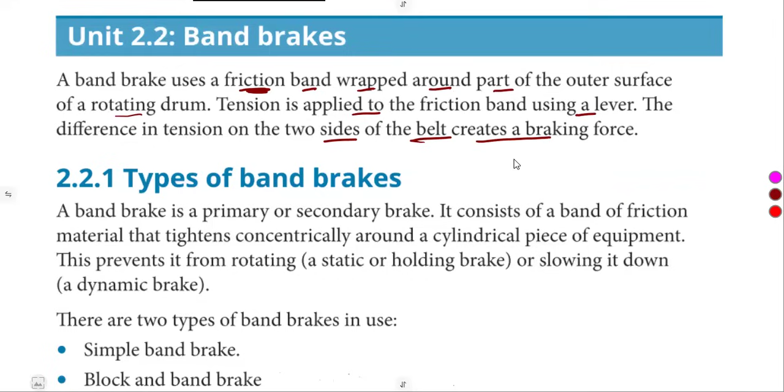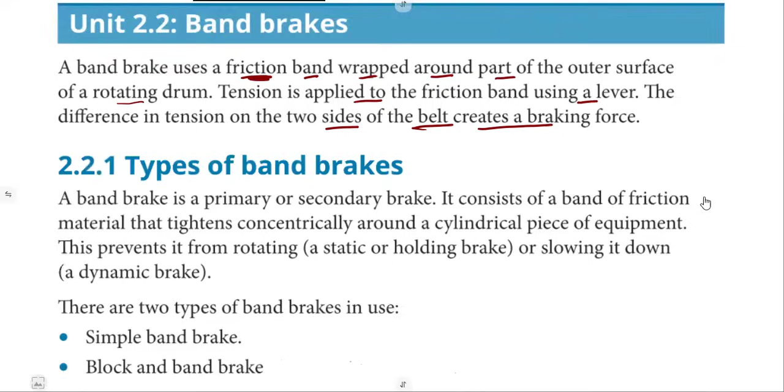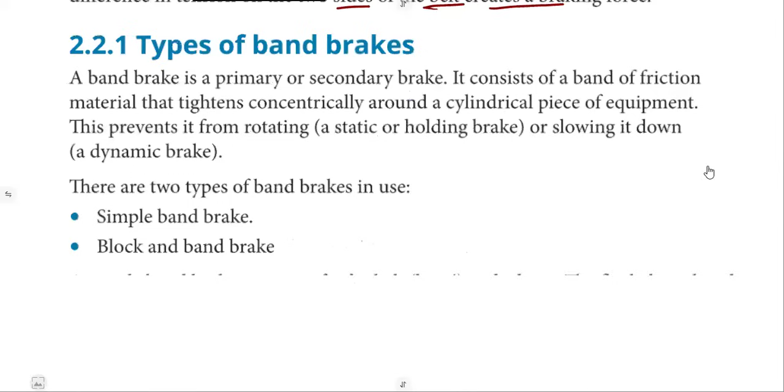Remember, I told you guys to go through your belt drives so you understand more of what we are actually working with. So it's the basic view of what we are going to deal with, these two types of band brakes. According to this source, I want us to consider that there are two types of band brakes in use.

The simple band brake, and here we have block and band. According to this source, I think this is the TVET series. It's fine if you work it like that, but I don't want us to use this. I want us to work here with the differential band. Differential band brakes, and the one we call block and band brakes, is a type on its own.

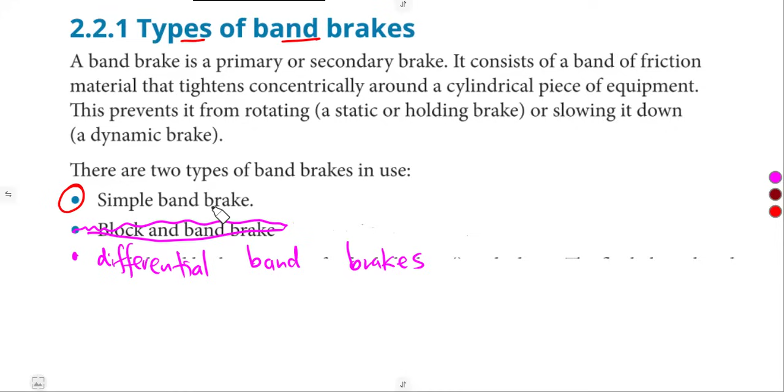As we have got band brakes, we have the block, we have the band, and band and block as a type. Here we need the types under band, the types under block, the types under band and block. So this is what I'm trying to say. So as I consider the two types of band brakes, this is what I'm going to give you guys. For us to understand more, I'm going to explain in emphasis the simple and also the differential band brake so that we'll be together.

So let us start with the simple band brakes. In this type of brake, one end of the band is attached to a separate rigid support or to the fulcrum of the lever, and the other end is attached to the lever at a distance from the fulcrum. Take note.

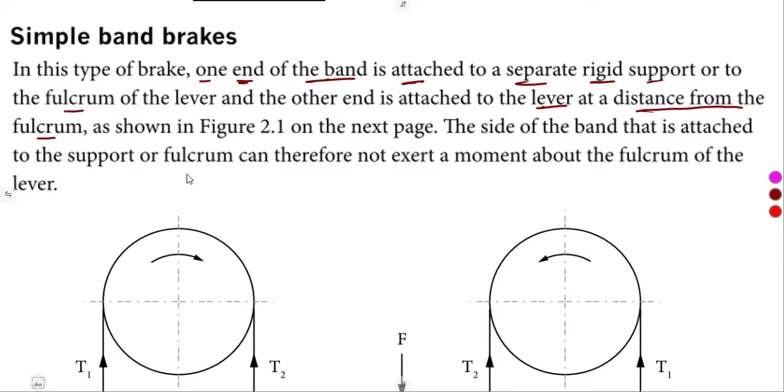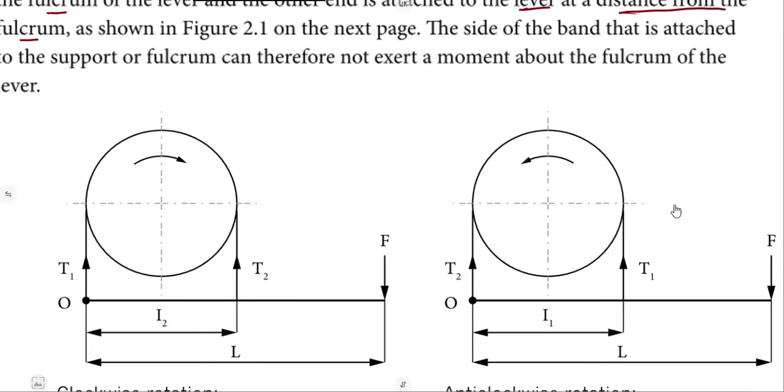At a distance from where? From the fulcrum. That is the most important part that we are supposed to be having there. That's the important part. So this is the part we want to see here. As we have in this presentation, let us try it like this.

We have got maybe, let's consider clockwise rotation and also anti-clockwise. So if we've got a clockwise rotation, remember the clock moves this way. This is the direction of the clock, clockwise. So as long as we are moving like this, it is clockwise. Then anti-clockwise, we are now opposing the other way. This is now anti-clockwise. We are now considering an anti-clockwise rotation.

All right, so as we take, guys, once we consider this part, we need to go back to our moments. Taking our moments about the point O, which is about the fulcrum. So this is where we've got our fulcrum here, the point O. So for a simple band, this is where our point O is going to be. You're going to notice a slight difference where the fulcrum is no longer at this point, that's on a differential band. So if we're to consider taking moments about the point O, which is our fulcrum, and this is the lever that we are going to be considering. That is the part that we are saying here.

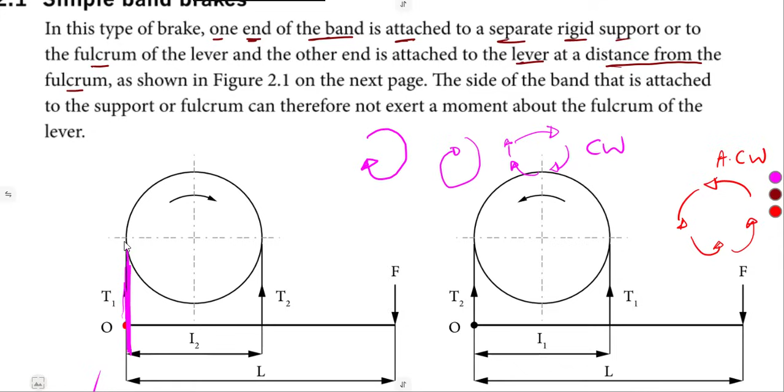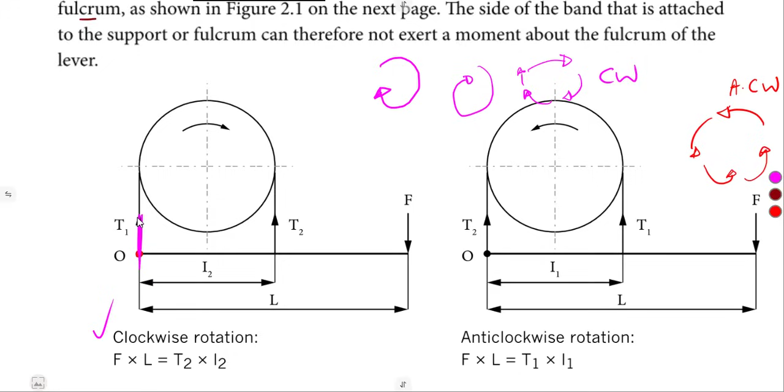Then the side of the band that is attached to the support or fulcrum can therefore not exert a moment about the fulcrum of that lever. There's nothing that we're going to have at a point which lies on the fulcrum, because remember, when you consider moments, it's force times distance. So there is no distance from here, from the fulcrum. That is why they are saying the side of the band that is attached to the support or fulcrum can therefore not exert a moment about the fulcrum of the lever. All right, so that is it.

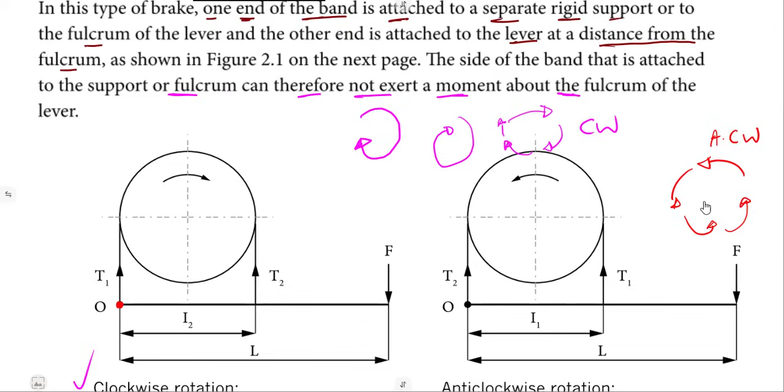So these are the ones, T1, T2, according to the rotation. Because as you can see here, we had T1 and T2. Now it is changing, it is T2 to T1. So how do you consider this?

You consider according to the direction we move. T1 follows direction. We start from T1. If it's clockwise like this, we move from T1 to T2, in that rotation of clockwise. So when it's anti-clockwise, we also do the same from T1, where we end, where we are going - the side of T2. Anti-clockwise, T1 going to T2. If it's clockwise, T1 going to T2.

So those are the ones that we are dealing with: one attached to the fulcrum and another one on the lever, but at a certain distance from the fulcrum like this. That is what we consider.

So this is it, guys. And we've got our drum here, which definitely from the center of this drum to here, we'll be talking of the radius of the drum. We'll see where it is needed. And our force, which is the applied force, just a normal force being applied also on the lever, as we can see, which is at a certain distance to the fulcrum, distance L.

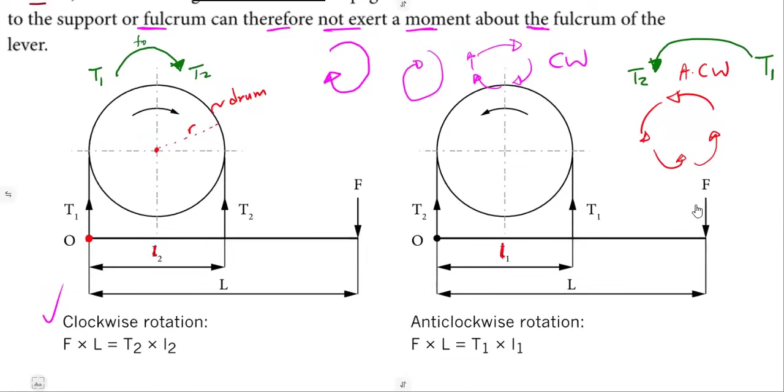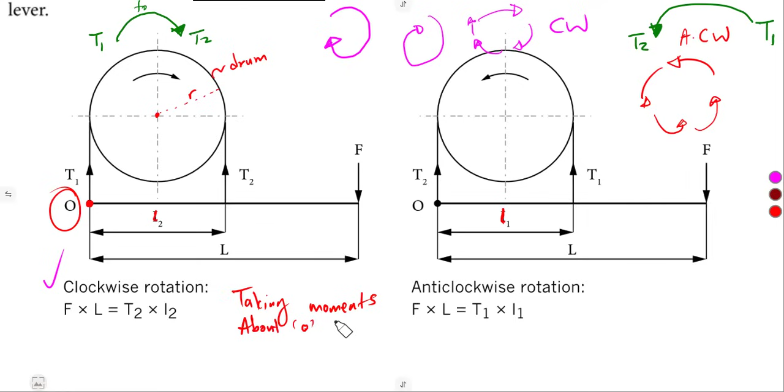And applying your forces, taking our moments about the point O, which is our fulcrum, we are going to notice, as we have our moments - taking moments about O, which is our fulcrum in that case - we consider the sum of the clockwise moments being equal to the sum of the anti-clockwise moments. So clockwise, how does the clock move?

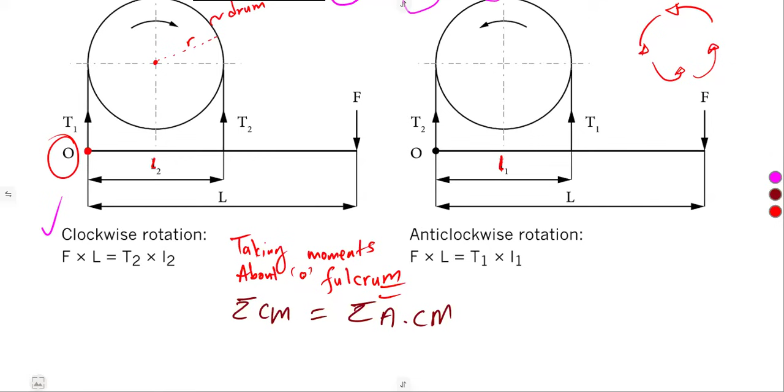We have got this one under a clockwise rotation - we're talking about the way the drum here is moving. The drum is moving in a clockwise direction. Not to say this is of the moments, no - the issue of moments is on its own. Here it is the rotation of the drum. So they can just give you a diagram without a rotation, then on the question they ask you to calculate this. Maybe they want you to find T2, or this force, or anyone - maybe they want you to find T1, or this force, no matter what you're given there, or even the distance.

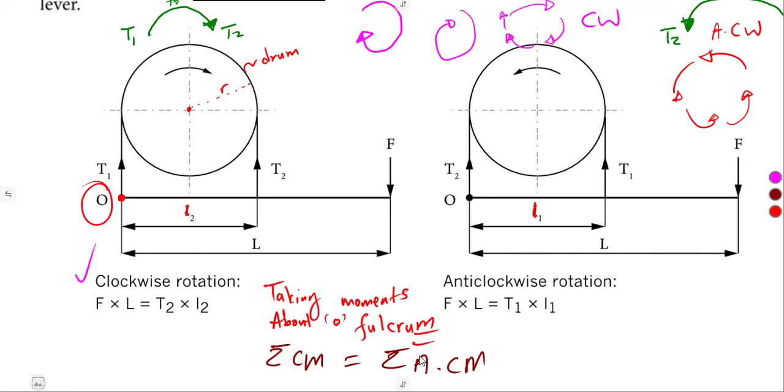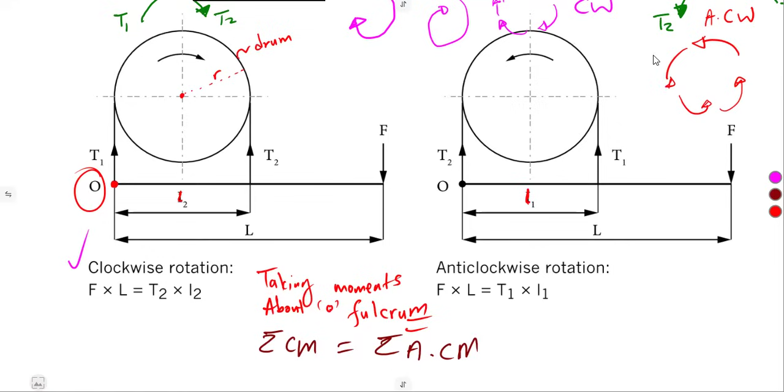That is where you apply this condition of your moments - not to say my diagram is under clockwise, so there's another way, no. Here it is just the drum - the drum is the one that is rotating in a clockwise direction. But as it's rotating clockwise, how did it affect our diagram? It affected T1 and T2. Remember T1 and T2, how I explained they move in that way of clockwise or anti-clockwise, from T1 to T2. That is the effect, that is the only effect. So how do we take our moments? Remember our moments, guys, as we take our moments about the fulcrum - this is where we have about the point O. So remember you're considering here, this is our lever.

So let's start with clockwise - it means we are taking these ones which are going this way to the fulcrum, that is clockwise. Anti-clockwise, they are going this way to the fulcrum, that is anti-clockwise, remember. So which one is going clockwise? T1, don't even talk about this because it is at the fulcrum, this one - so it's a waste of our time to consider that T1. Let's just ignore this one, okay? So let's move on to T2. T2, as we can see, it is facing up, so as it's moving towards the fulcrum, it's just going to go this way, this is it, to the fulcrum. So this is what?

Anti-clockwise, as we can see this way. T2, from where it is, is just going to go like this - that is anti-clockwise, so T2 is under anti-clockwise. What about F? F is pointing down, as you can see. It will be going in this way to reach the fulcrum. This is the direction that it's going to take. And which direction is this? Clockwise. So as you can see, this one is clockwise. So we only have one clockwise and one anti-clockwise.

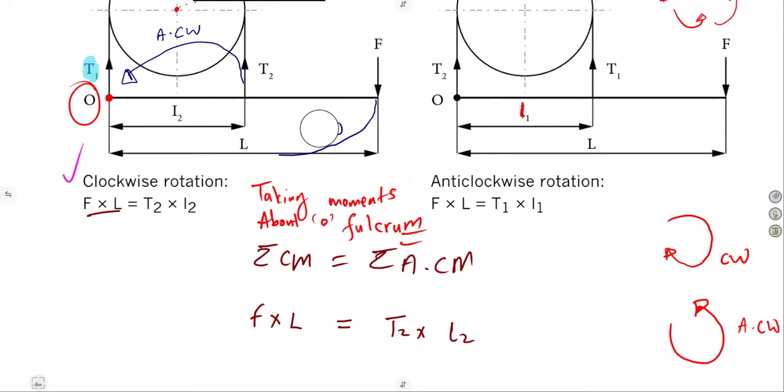When it is like this, there's nothing. It's just these two, guys. There's nothing here. Just these two. There's nothing there.

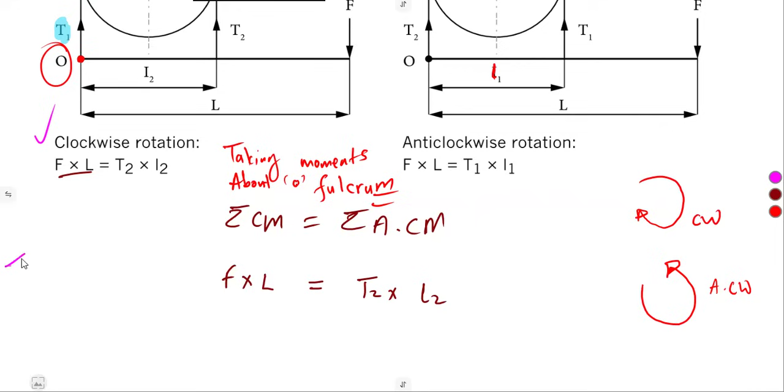So using this, you use this formula when you are asked to calculate the torque - the tension, sorry, why am I on the torque? The torque is another part on its own. The tension, sorry - when you're asked to calculate the tensions, it's T1 or T2.

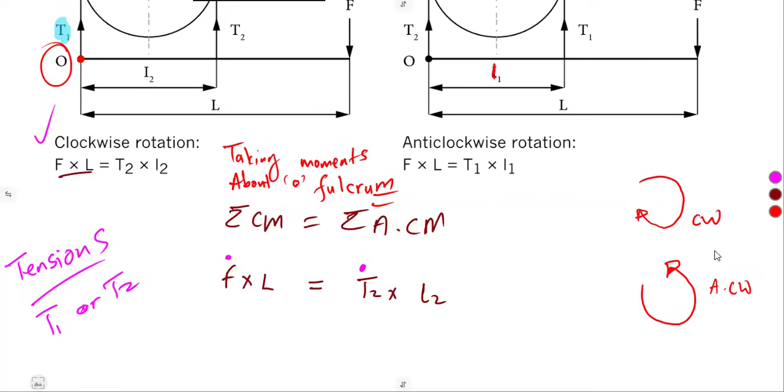So if they want you to calculate T2, it's definitely a condition like this of a clockwise rotation of the drum. You know that on this formula, there is T2 you can calculate, or maybe they want you to calculate the force, or maybe even the distance. All right, so this is what you have.

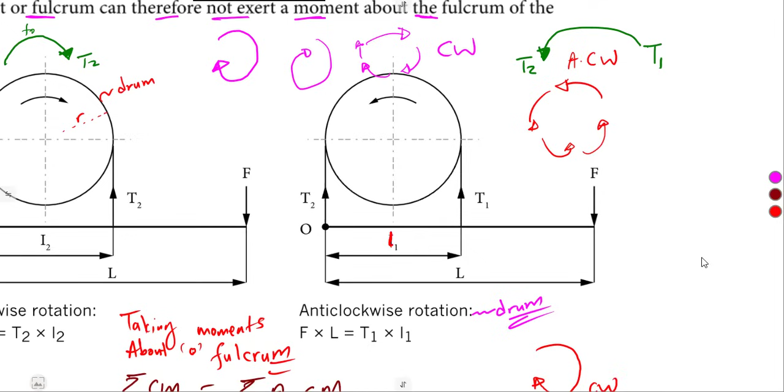So guys, nothing has changed if you check on this side for an anti-clockwise rotation of the drum. Remember, I said this is the rotation of the drum - it only affected this arrangement of T1 and T2. Only that. If we understand this, guys, we are not going to have a challenge. The reason why is once we have this, if we are to take our moments about the fulcrum, just like here what we did, we are going to notice that the sum of the clockwise moment is equal to the sum of the anti-clockwise moments.

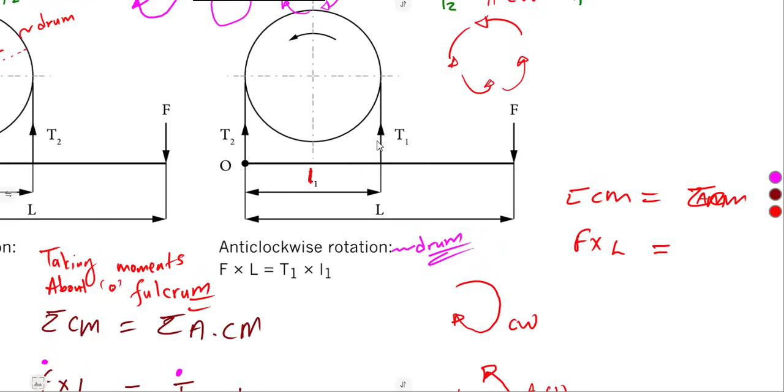So which one is going in the clockwise? Same as what we saw here, does not change, guys. This is our diagram. This is T1 that we are considering going this way, anti-clockwise. This F going this way, clockwise. Nothing has changed. So it's going to be F times the distance back to the fulcrum, which is L, is equal to the anti-clockwise - it's T1 back to the fulcrum. So it's T1 times L1. Just like here, nothing has changed.

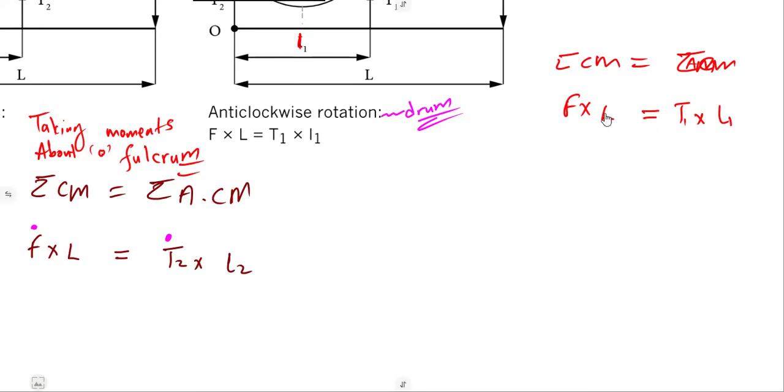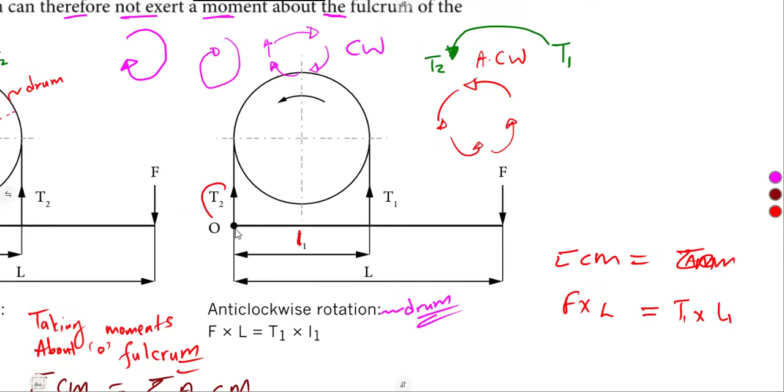So as you can see, when it is of this condition of a simple band brake, the calculations for T1, F, whatever that you want, is the same, guys, for any part that you're given. Just know the rotation of the drum so that you know exactly this arrangement here - it affects that arrangement only. So if you do not pay attention on how the drum is rotating now, that's where you end up using T2 where T1 is, or using T1 where T2 is supposed to. No, pay attention to the rotation of the drum, this part. Once you know that, you are done.

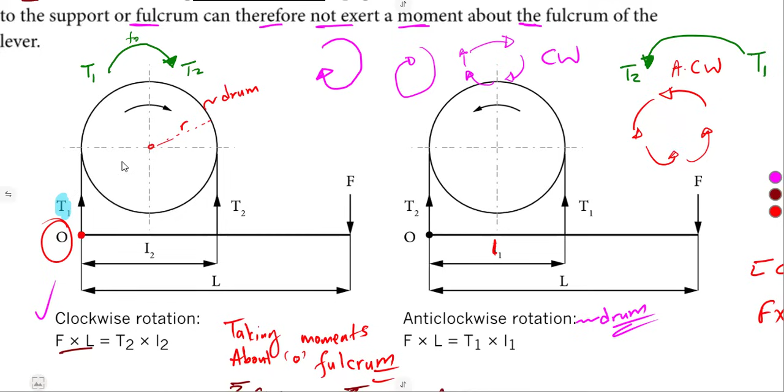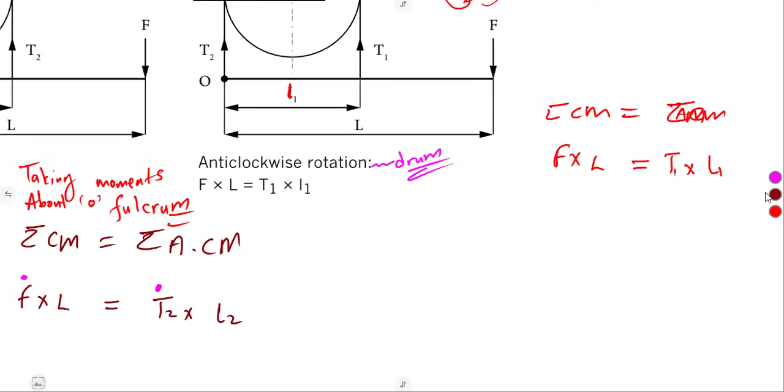So we are going to apply this later on in terms of our calculations. Let's see the differential band brakes. In this type of brake, both bands are attached to the lever at a distance away from the fulcrum. That is how we know this is a differential band. Both bands - here, the bands, one was attached to the fulcrum, another one a distance away from the fulcrum.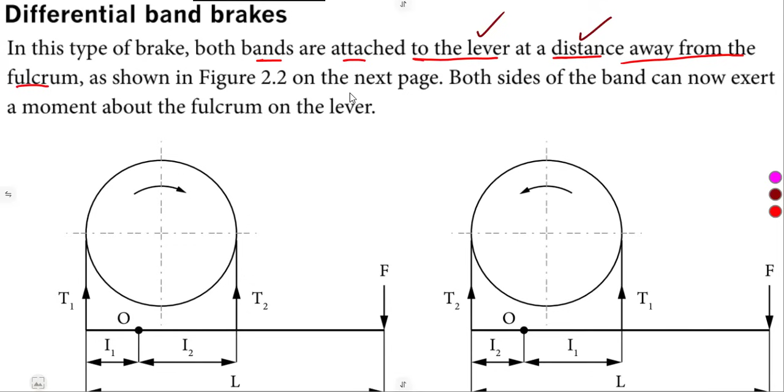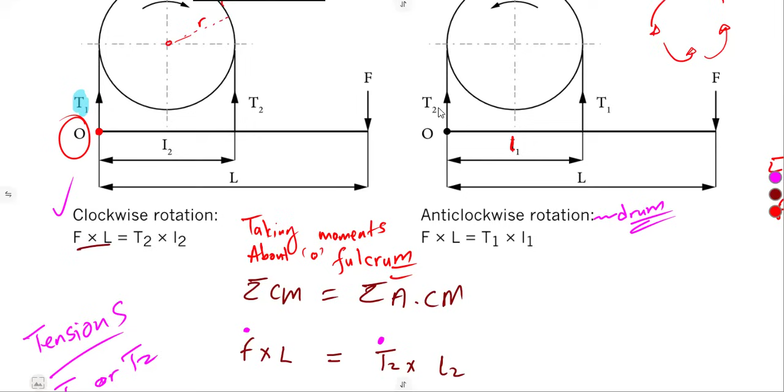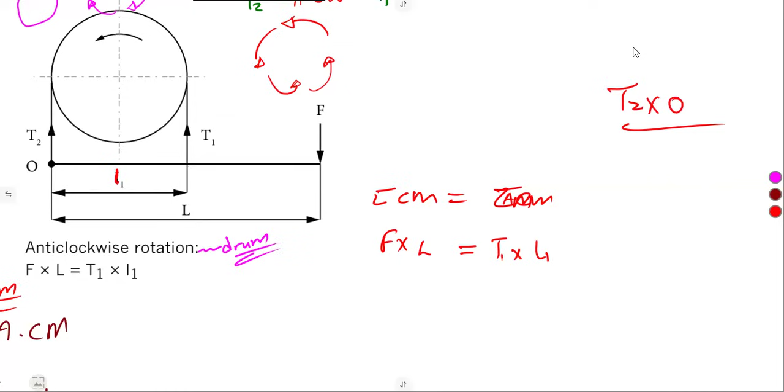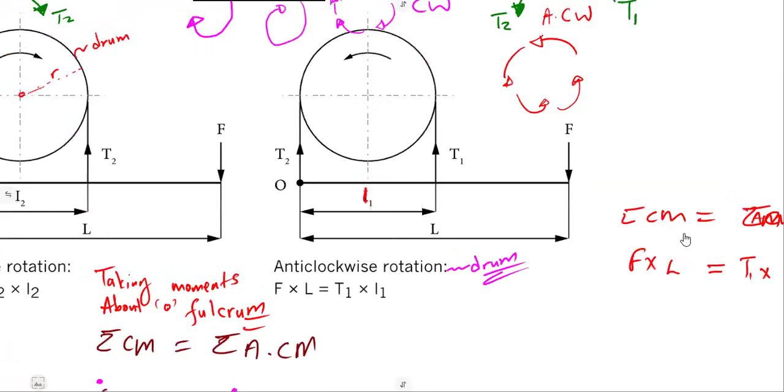So both sides of the band can now exert a moment about the fulcrum on the lever. It's no longer here where we are saying if it is like this, on our formula, we don't see T1 because T1 was on the fulcrum, so we don't see T1 on this formula. If it is this one, T2 was on the fulcrum, so we don't see T2 on the formula when you apply our moments because there's no distance - it was supposed to be T2 times 0 or T1 times 0, so we are not doing anything if it is like that. But in this case, that can never happen because T1 and T2 are both at a certain distance away from the fulcrum.

Once you understand this, you are done. That's a differential band.

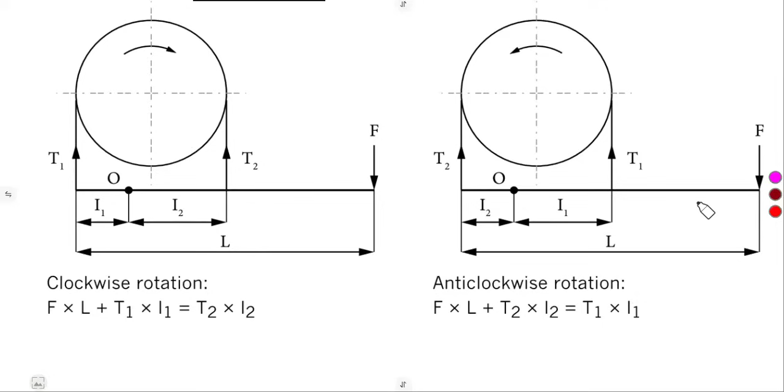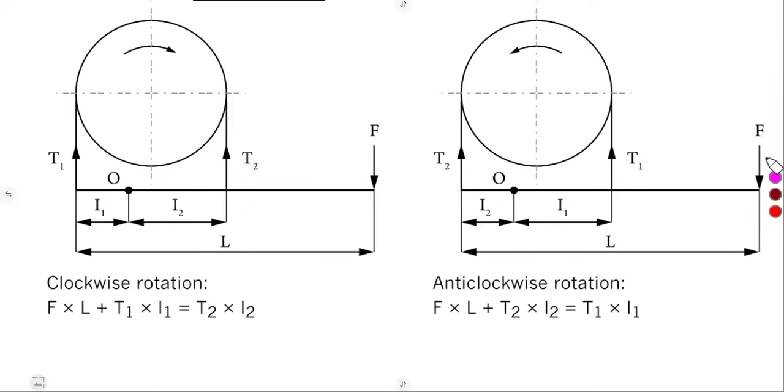According to this source, this is the best way I think that we can explain it. For the TVET series for Mechanotechnics N6, I don't know guys, I think they just... some of these words might affect you if you're using the textbook, but there's some important things they left out. We're used to them giving us exactly what we need, but there they were just beating around the bush. I don't know what happened or who was the author, who was managing that Mechanotechnics N6. But anyway, that is why I have to bring other sources to you so that you get important information for when you are going to answer your exams. But please continue to use that textbook. I'm there to make sure there is clarity in it also, so if there's any section you don't understand, let me know.

So this is it, a differential band. Now we notice our fulcrum is shifted. So how are we going to have our moments if the fulcrum is shifted like this?

Still the same way, we consider the drum in a clockwise direction. Remember guys, do not mind this one, it's about the drum, the way it rotates. If it is clockwise as we can see here, it affects how T1 and T2 are positioned, from T1 to T2. So that's what we see, T1 going to T2. For anti-clockwise, same consideration, from T1 going to T2. So T1 is always on the tail from T2, okay, that is the condition there.

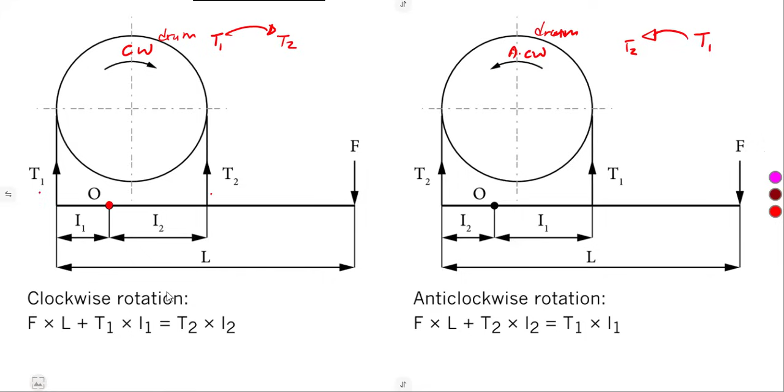So let's consider our moments. Let's start with this one, for a clockwise rotation of the drum, what is it that we're going to consider? Remember our moments guys, the condition is taking moments about the fulcrum. Clockwise moments, the sum of the clockwise moments must be equal to anti-clockwise moments. So this is what we're going to have.

Which ones are for the clockwise, the way the clock moves? This one, you're going to see that it is F like this, going clockwise to the fulcrum, it's going to go like this, that's clockwise, alright? Look at T1 and T2, they're facing up, so T2 is going to move this way, which is anti-clockwise. This is our T2 going to the fulcrum, so it's going in an anti-clockwise direction. Then if we consider T1 to the fulcrum, it's going to go this way, this is the direction. So which direction is this? Clockwise, so it's going in a clockwise direction.

So on the clockwise we've got two things here, the F we said is clockwise, as you can see it's going to go like this, so it's clockwise. That's why we've got these two, F times L. On our formula here, F times L, which is F times this distance.

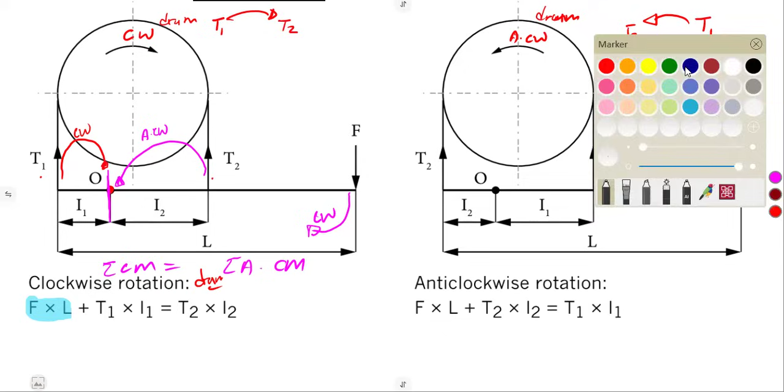Alright, there they made a mistake on the presentation. I thought I was going to edit this one but I didn't manage to in time. So let me just correct this one here. I don't know, you see this textbook guys, the people doing them were also rushing, I think it was an issue of market. The TVET series wants a market, they want a market, they are rushing, they want to remove syllabuses at the same time. These people, I don't understand, do they want people to pass or are they now after the market? So guys, don't tell them that I said this, but I don't understand.

So it was supposed to be like this. It's F, you take the distance from force to the fulcrum, here, this is our fulcrum here, so it's supposed to be there. I think like this we can understand each other. Then the same thing here, supposed to end here. So if it is like this, then our formula becomes correct. Our L is supposed to be the distance of F to the fulcrum here, not to T1, not to any tension, but to the fulcrum, as we said, taking moments about the fulcrum so that we understand each other.

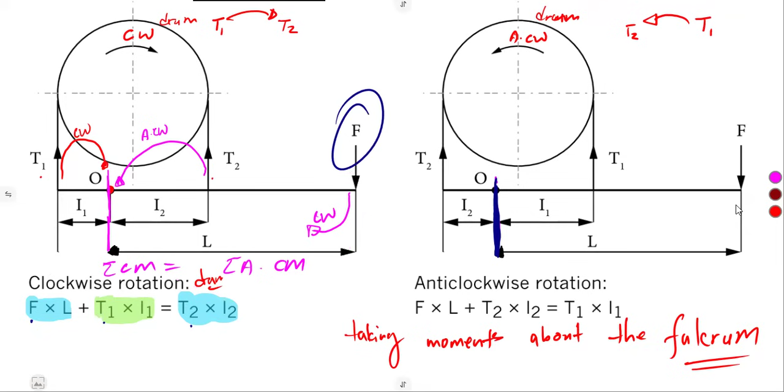So taking our moments about this fulcrum, we're going to see that those ones for the clockwise never change. It's still the F that we had. So it's F back to what? To the fulcrum. So this is what we have here, our force F back to the fulcrum, this one.

But instead of us having T1, this is now T2, going this way, back to the fulcrum. It's now T2 and what? L2. So this is what we have.

Remember, T1 and T2 are affected by the direction of the drum. That is the only part that changes. Which one is going in the anti-clockwise? Definitely T1 is going this way. So that's T1 times L1, the distance back to the fulcrum here.

Nothing has changed. So know the direction of the drum, know it very well so that you do not confuse these T1 and T2.

All right, so once you know this and have applied all this information, what you need are the formulas, those ones that I mentioned individually. I want you to refer back to your N4 Mechanotechnics, working with your belt drives.

But anyways guys, I try by all means to understand that some of us, some of you, are into work, going to work at the same time. You need to come back and cover up your stuff to advance as you are working, and for you to go back to your N4 stuff, it's going to take a lot of time.

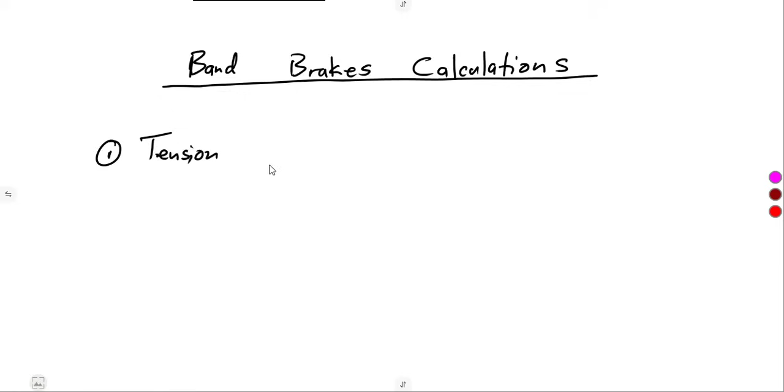So let me try and list the formulas that are important. All right, so the first one is going to be on the tension ratio, as we do understand those belt drives, guys, where we've got the tight side and the slack side, this and that. Remember, when you're dealing with belt drives.

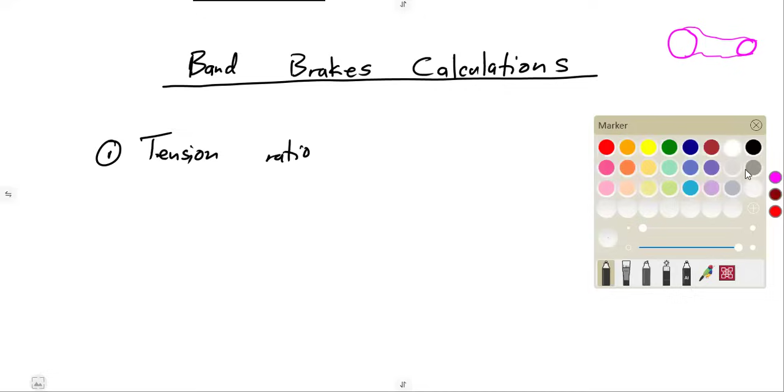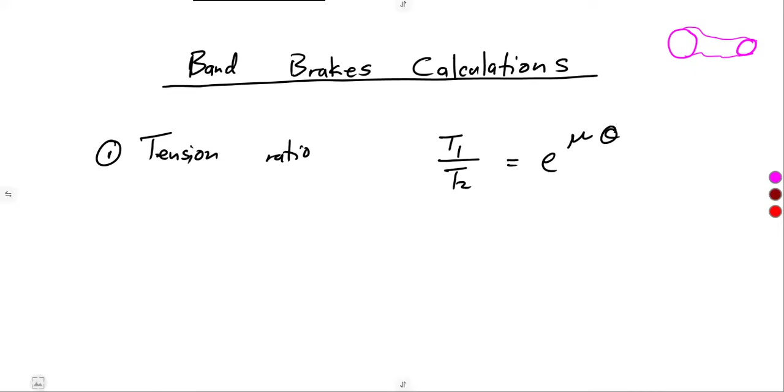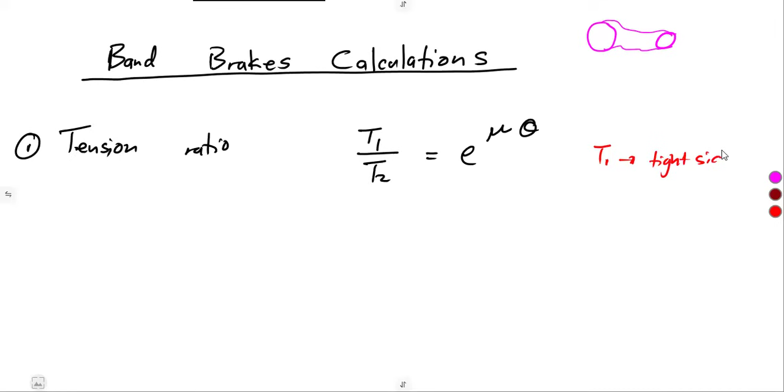So that is the condition that you're going back to again. So the tension ratio, that's T1 over T2, is equal to e to the exponent of mu theta. Where T1 and T2 are simply these tensions, but we understand that T1 is what? The tight side. So T1, that is the tight side tension, which is actually the fixed end, where we have got the tight side.

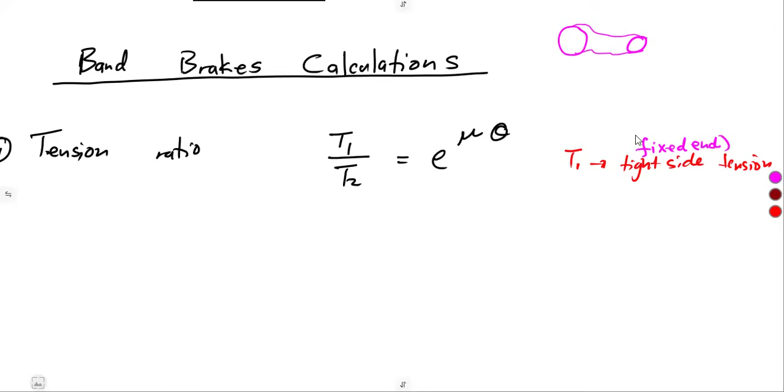It can also be referred as the fixed end, the fixed end tension, the tension that is for the fixed end. Tension, guys, is just like force, remember? So it is measured in what? In newtons. Then T2, we do understand that is our slack side.

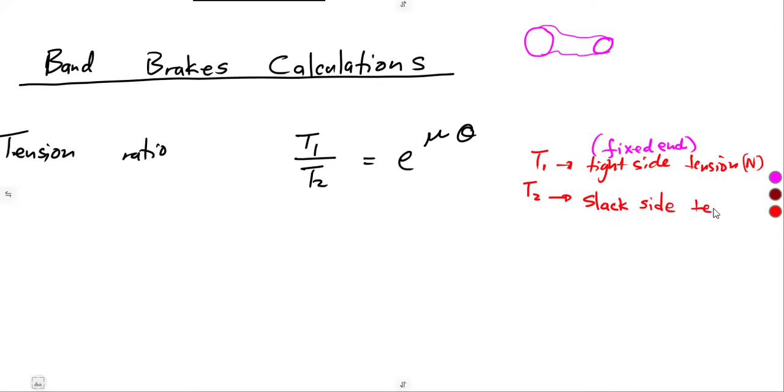The one that is slack, that is what do we call it, guys? You see, English, the disadvantage of English is, what can we say? Something that you want to explain, like you understand it and you want to explain to someone to make it simpler, you might make it difficult because of the way they understand also. Something that can be simpler to you can be difficult for someone else to understand in terms of simpler understanding. But I just hope these words, guys, tight, slack, have meaning to you.

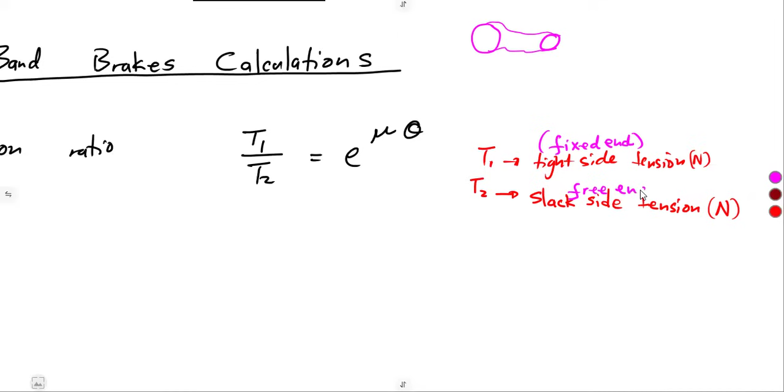So this is just like a free end fixed on the tight, all right, free where it is slack. So that is the free end. All right, so those are the tensions. Remember, this is E, which is already on our calculator, the exponential on our calculator. So guys, we're just going to put that one.

But we've got the coefficient of friction. So that is our coefficient of what? Of friction. As we do understand, the coefficient of friction does not have units. It is just a constant that you are given.

Then theta is the angle of contact or the angle of loop. The angle of what? Contact or the angle of loop from our belt drives. We talked about this, and it must be in what? In radians.

So also for the conversions, guys, to radians, it is up to you. When I used the N4 consideration, I explained a lot of things there. But you can also use this: Pi is equal to 180 degrees. Pi in what? In radians. And these are degrees. So you can use any conversion.

So if I simply want to convert to radians, mostly conversions, because theta is found in radians. So maybe they can give you theta in degrees. So you take the theta in degrees over what? Over 180 degrees. Then you multiply by whatever pi, this constant pi, whatever that you have will be in degrees. So this is the angle given, the given angle.

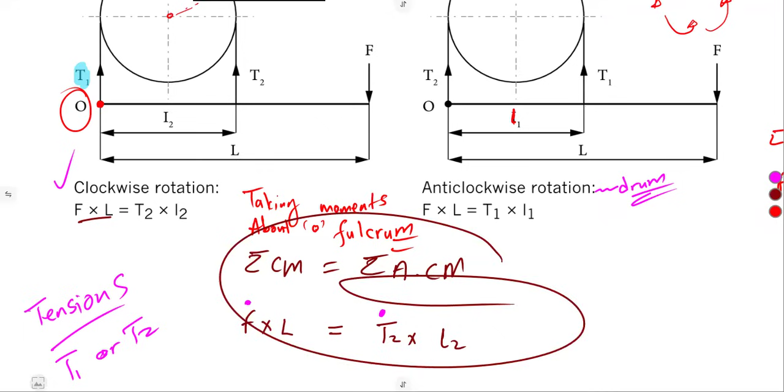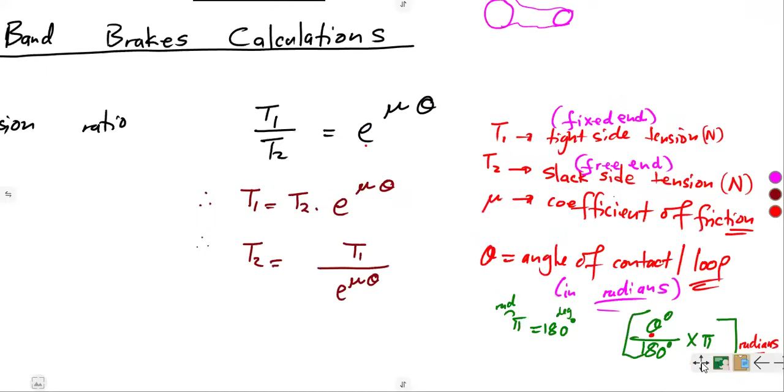But one way or the other, we are supposed to go back to these. So as you can see, especially from a simple band where there is only T2 in a formula or T1 in a formula, you will use it to find T1. After that, you then find T2 using the tension ratio. So they work hand in hand. Never say there's a substitute there, to say if I know the moments, that's going to save me to find those tensions, or if I know the formulas, they are going to save me. Both are going to save you. So you must understand both as an individual.

All right, so this is it on our tension ratio. This is just a recap. I was not supposed to even explain much like this, guys. This is just your recap there.

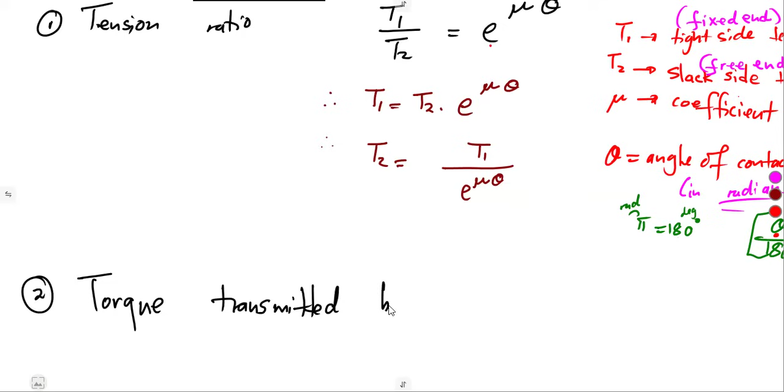All right, then now we're going to move on to another important formula, which is the calculation of the torque. The torque transmitted. So they will need you to calculate the torque transmitted by the band, which can be a condition where they're saying the torque transmitted by a brake drum. They can also just say the torque transmitted by the brake on its own. This is just one of the same thing that you calculate there, which is the torque.

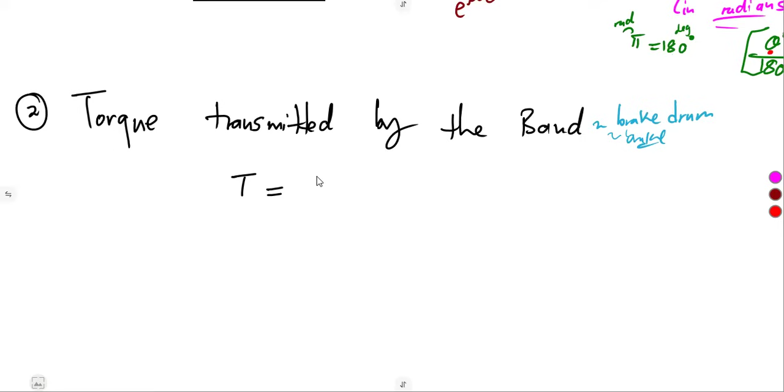So which formula can we use? Remember torque, we had this from when we're dealing with clutches, but we're using the forces. So instead of using the forces, now we use tension. So torque is equal to T1 minus T2 times the radius of the drum. So this is going to give us our torque in what? In Newton meters. So this is it, guys.

We talked about this. This is our tension of the tight side. This is our slack side. All right, so R there is the radius of the drum. So that is the radius of what? Of drum, which is measured in meters. So with this, guys, we've got our torque. That is what we can have. But the normal way, if we do not have any difference, the torque that is generated by the lever can be calculated also.

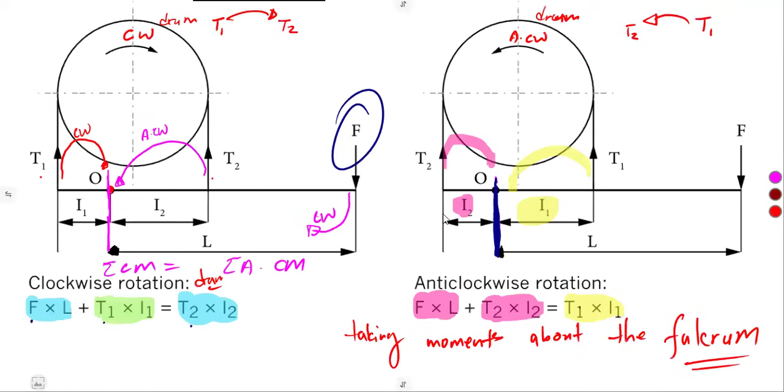So let's differentiate between the torque transmitted by the lever. As we were considering our lever here, what will be the torque? We can simply consider the force on the lever, which is the weight, working with the resultant weight on the lever.

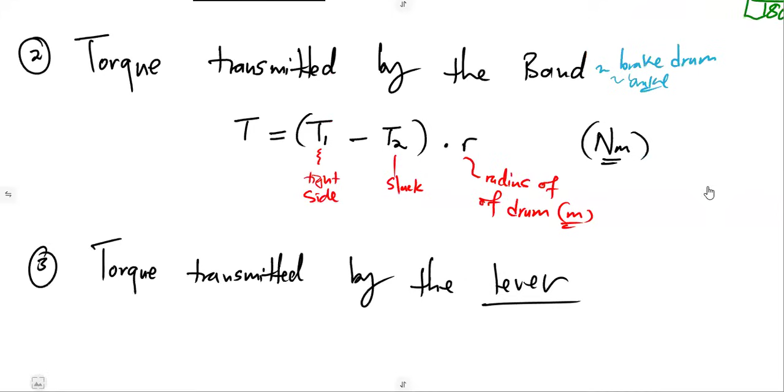This tension, guys, is the force. But remember, there is a tight side and a slack side, so we need the difference, just like the effective tension. When we talk about the lever, we just consider the general weight, the total force that you're going to have.

So you can just say the torque is weight times radius, which is same as force times radius. Now our R, the radius, is the perpendicular distance of the load from the lever pivot, because here we talk about the lever. So if we say radius, we cannot say it is the radius of the drum. We have to consider this.

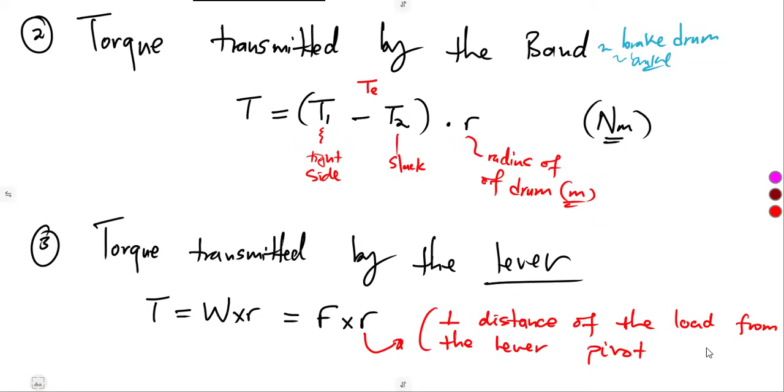Let's specify this one: perpendicular distance. This must be the perpendicular distance of the load which lies on the lever, from the lever pivot, because it lies on the lever. If we take it that way, then all of us will be in the right direction. So that is the torque transmitted by the lever.

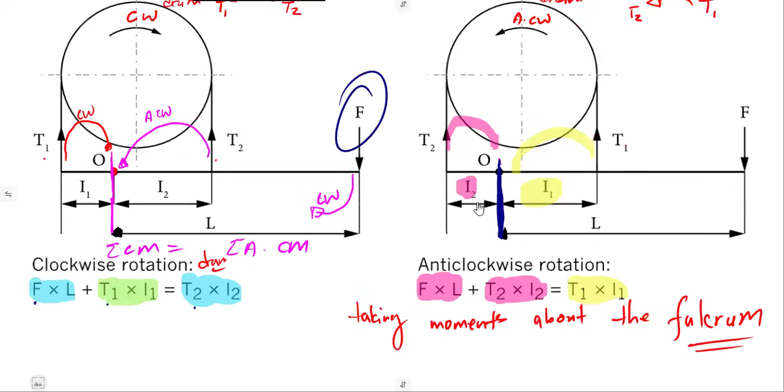Then the brake system of moments, I talked about it here. Working with moments, I've already explained the issue of moments from a differential band, and also dealing with a simple band where our fulcrum is at the end point, attached to one of the given tensions. So I'm not going to put much on that because I have explained it. I will end up confusing you guys on what you have already understood. In detail, I want us to work with more questions, more examples as we shall move on.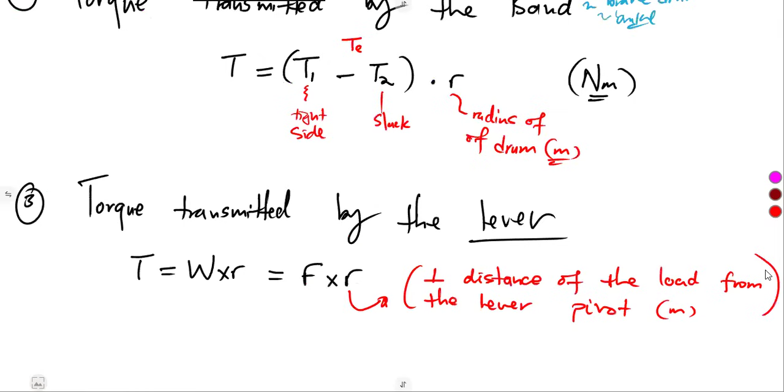What else can I explain? Some of these formulas, we'll see them, guys - power, calculations of power. Remember power is 2 pi NT over 60. We are given the torque, the moment of inertia, mass times k squared, the radius of gyration, measured in kilograms meters squared. Talking of the angular acceleration from the torque over the moment of inertia, in radians per square second.

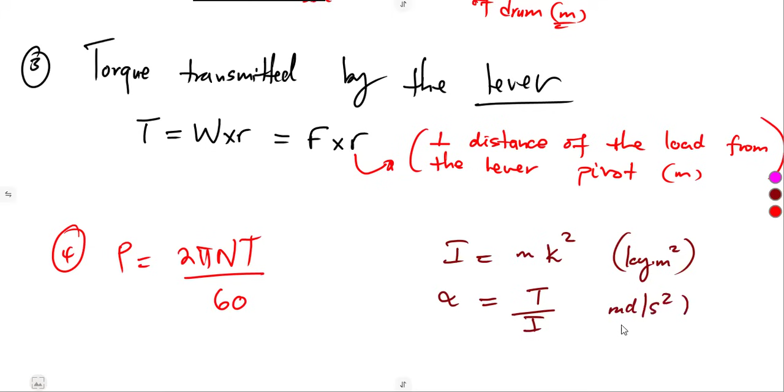As we are dealing with the brakes, I say this one is negative because there's a deceleration - we are braking so that the object slows down or comes to rest. All those formulas for angular motion, guys, they are not going to change. Theta equals omega 1 t plus half alpha t squared - those omega formulas are not going to change at all. So here I'm not going to waste time, just for us to understand. But these are some of the formulas that we might need.

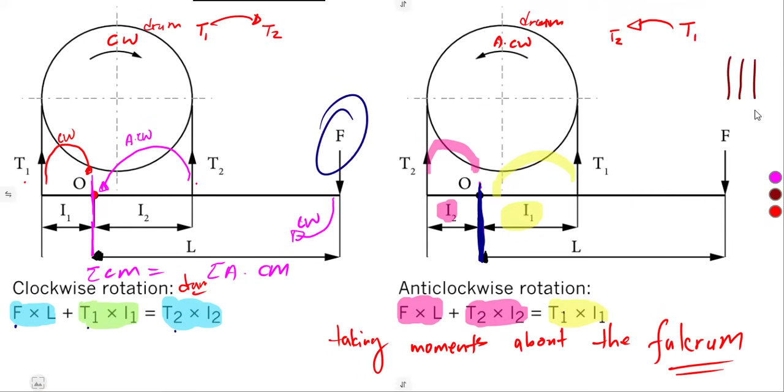What else that we might need? We talked of the power, meaning you can make the torque the subject of the formula when everything is there. Then, if we consider these moments where they are being applied, we are going to see scenarios where the angle of contact is being applied, or a certain angle that will affect our T1 and T2. So I want us to be very careful in that consideration, as T1 and T2 are supposed to be vertically - meaning these are vertical components.

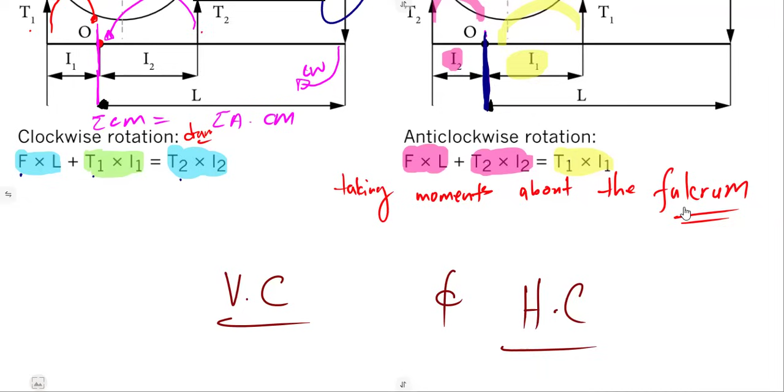So as an individual, I want you to go through the video I did on vertical components and horizontal components, resultant, this and that - I think it was under engineering science as an introduction, just to understand these components because it is going to affect you in your engineering science. That one I'm going to explain in examples, guys, I'm not going to do it here. I'll end up explaining a lot and confuse others who already have an idea of this part. So as an individual, please go through that video checking on components - it's about engineering science, just like an introduction. I explained about everything, how do you calculate those. So that is it, guys.

On our band brakes, I want us to consider this part of our band brakes. Then in our next classes, we shall be dealing with or working with examples. Like I said, TVET series, I'm not going to focus on that because even the examples, guys, I was wondering what is happening with TVET series. But I'm going to find ways to bring those questions to you guys so that you prepare for your exams, which are ahead of time.